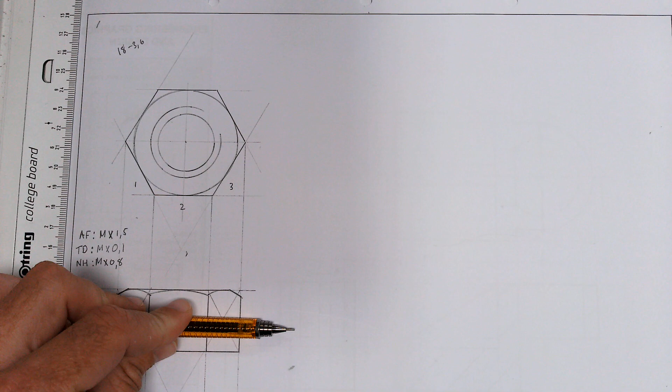Alright gents, so we are at this stage in our drawing of a hexagonal nut. We've got three faces in the front view, if you like, or it depends on how well it would be third angle orthographic, so that would certainly be the front view. We've got the top view of the hexagonal nut, all in position. Now to the right of the front view, we are going to construct the right view, or in this case, a view with two faces of the hexagonal nut.

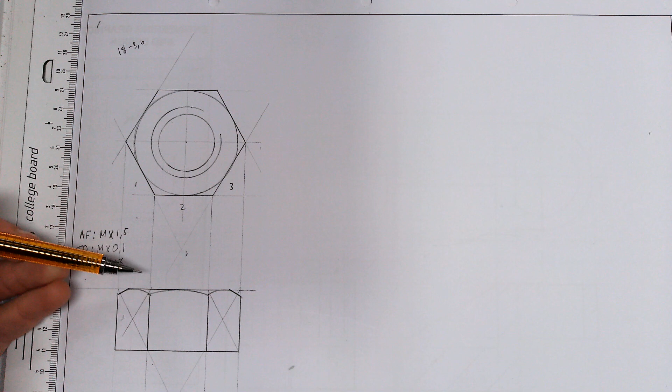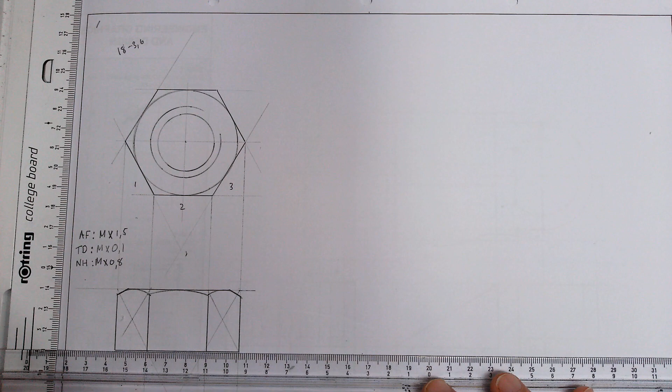Now I don't have a set of axes, and a margin 10 above and 10 below in contact with either of these views. So what I'm going to do is use my own initiative, and I'm quickly going to draw in a set of axes here, just so that I've got a decent distance between the three faces and the two faces to the right. So I'm just going to draw the projection straight across of the height of the nut. Right, so let's do that first.

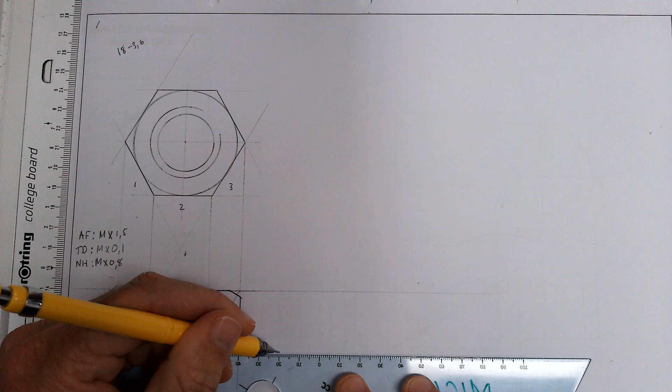There we go. And then I'm going to measure a total of 20 millimeters. A total of 20 mils to give me what would be a margin, axis, and a margin. There we go. And there I'll go and send that up. Now, remember, if we're looking at this nut from that view, so there's the eye, we're going to see just two faces of the nut.

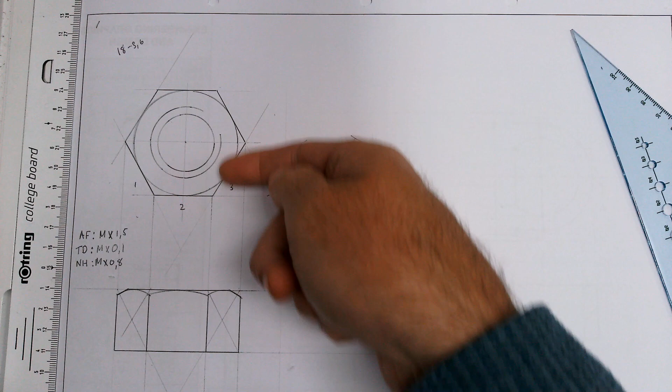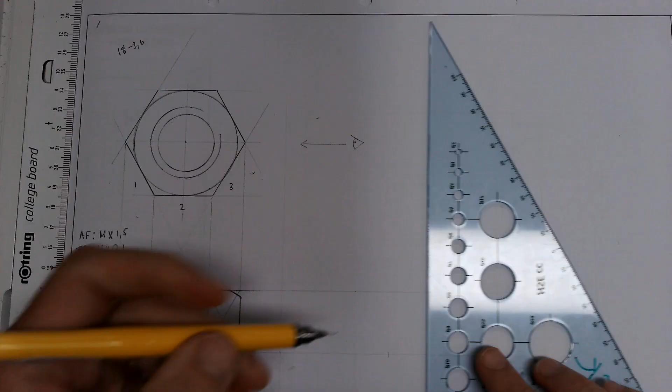To get the total width, we're going to just take our compass, and I'm going to go from that point there all the way across to that point there. If I set it up better in the beginning, I could have had a 45-degree deflector to bring everything down. But that's as far as the nut will go, right? So there's a nice little point through which I can produce a construction line, and you will see now that the two faces of the nut will sit flush in that position. What's also really good about this, it's quite simple to see that that point is the halfway mark of the two faces. So we have symmetry on either side of that point.

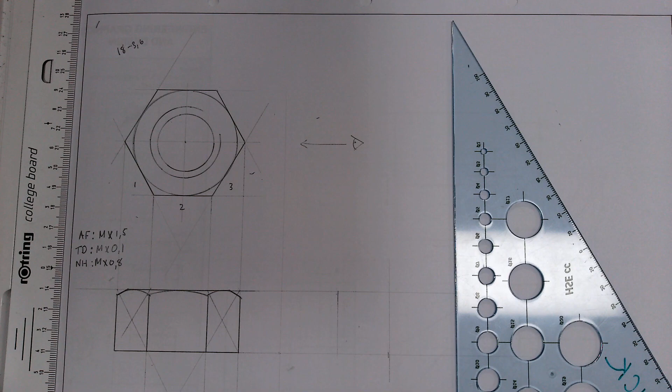So I can go ahead and find the halfway mark here, by using my little construction line over here. Again, I could have done this a lot better having set up some axes in the beginning. So that's halfway. There we have it. And so then I'm going to bring that down. So the two faces of my hexagonal nut will sit in there and over there. How do we do this? Well, very similarly to what we've done before.

We're going to go 60 degrees from the left. We're going to go 60 degrees from the right. Then we're going to do the same thing from the inside edges of this center marking at the top. We're going to go 60 in from the right, and then 60 in here from the left, and you'll see we have two intersecting projections over there. We're going to take our compass and do the same thing we did previously. We're going to find a tangent.

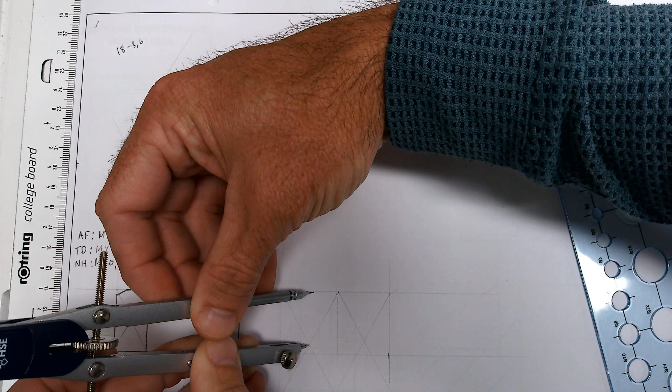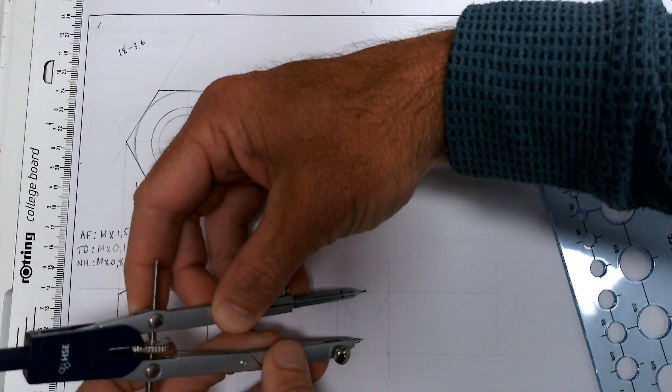So I'm going to put my compass point on that intersecting point there, and just find a tangent where my pencil does not go over my construction at the top. And I'm going to meet the face there and move it across to there. Right, so that looks pretty good. I'm going to go to the other side, and it should be good in terms of the layout and the setup. It should be pretty accurate. Let me just, there we go. Oopsie. There we go.

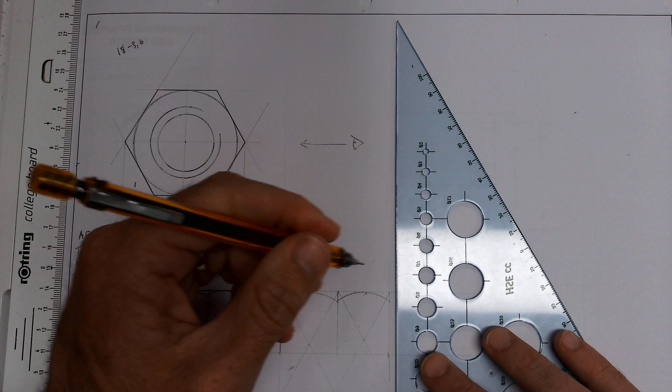Right, almost perfect, almost. So now I'm going to finish the nut off left and right, filling in the solid outlines, the darker outlines, and then across the bottom. There we have it. In order to get that chamfer above here, we're going to complete the rest of the lines that we've got there already in construction.

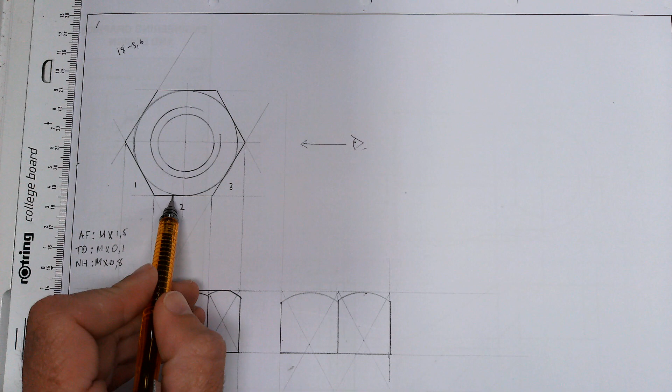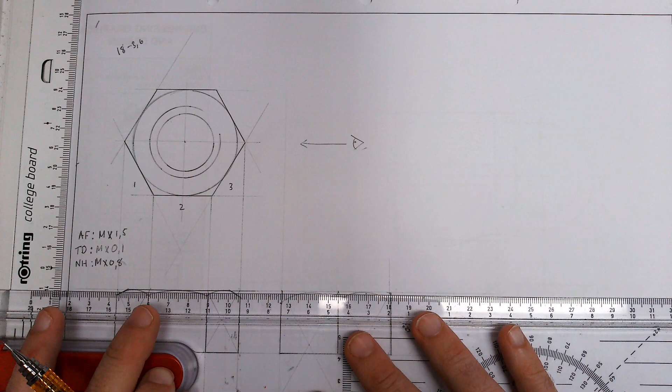If you see the nut from this view, this raised point on the chamfer here, and that raised point on the chamfer there will be that corner and that top corner over there. So we're going to construct a line straight up to that corner and a line straight up to that corner over there. That's not looking so good. Then we're going to come across along the top and draw that tangential. Okay, so there we have it.

We have 2 faces of the hexagonal nut, 3 faces of the hexagonal nut, and a top view. Alright, that's what's required for the 2 faces, gentlemen.